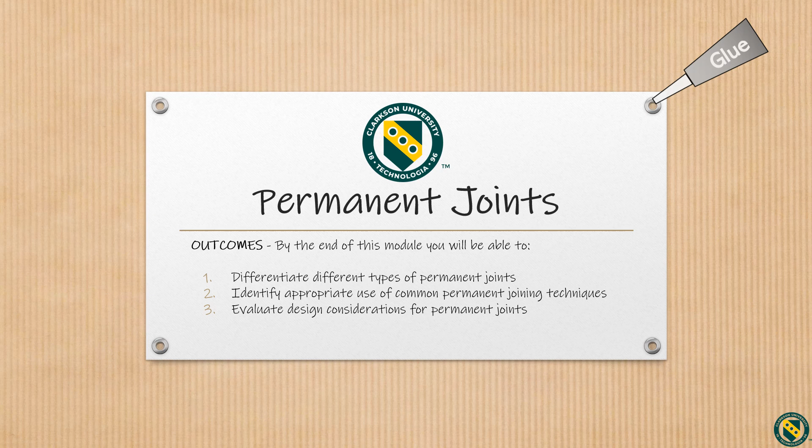A mechanical joint is a section of a machine which is used to connect one or more mechanical parts. We classify joints as non-permanent or permanent. Many industrial machine joint types are non-permanent.

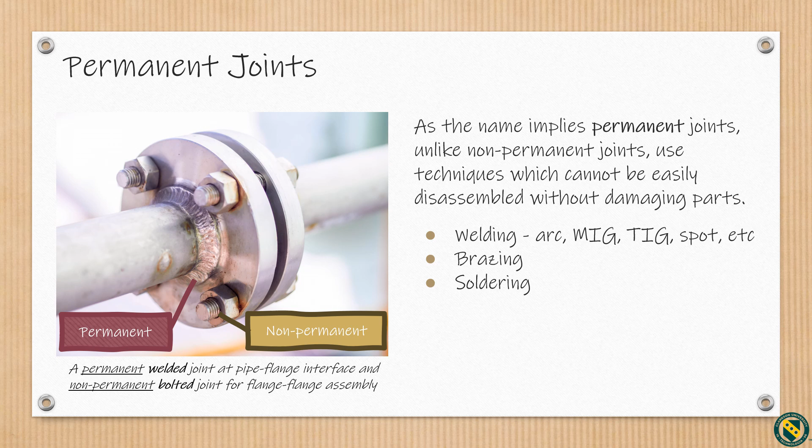Permanent joints, however, as the name implies, are designed to hold together forever. They're not easily separated without damaging parts. Examples include welding, brazing, soldering, adhesive bonding, and riveting.

Welding is a method of fabricating a permanent joint. It is typically used to create joints in steel, aluminum, or some thermoplastics. In general, the process consists of using electrical current fed through an electrode to bring the base materials to their melting point and to stir the joint together while the electrode is consumed.

As the joint cools, the two pieces of material are permanently joined and can only be disassembled by cutting them apart. The materials that are being joined should always be the same or very similar.

For example, welding a piece of 6061 aluminum to a piece of 5052 aluminum is generally okay as the material compositions are similar. Welding aluminum to steel is not recommended as the two metals melt at very different temperatures and the resulting joint would be very brittle and not structurally sound. There's many resources available for determining the weldability of materials.

Welding generally requires some amount of training and a lot of practice to become proficient. In certain industries, certifications are required in order to demonstrate the proper level of skill, for example, in pressure vessels, lifting bales, and aerospace applications.

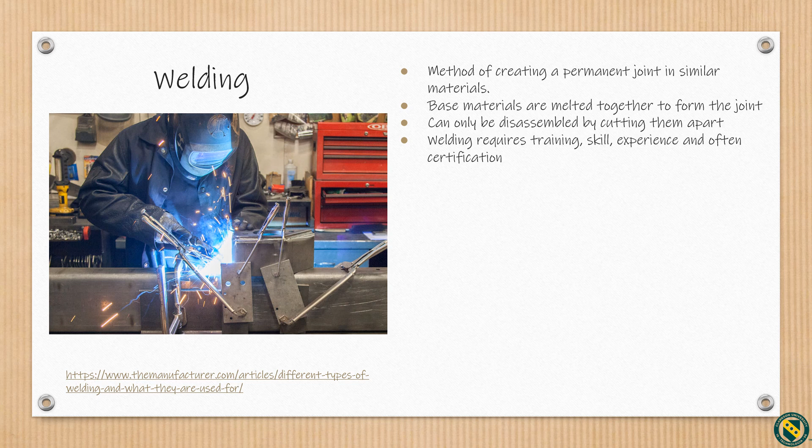Welding shouldn't be confused with brazing or soldering, which don't melt the base metal when creating the joint. The three most commonly used processes in welding manufacturing are SMAW, shielded metal arc welding, commonly referred to as stick welding; GMAW, or gas metal arc welding, commonly referred to as MIG welding; and GTAW, gas tungsten arc welding, commonly referred to as TIG welding. Examples of other less commonly used processes include spot welding, plasma arc welding, electron beam welding, and friction stir welding.

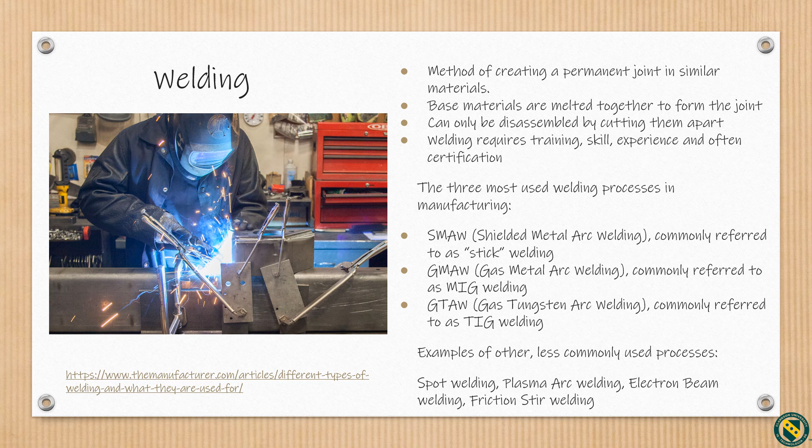Shielded metal arc welding, SMAW, is the simplest, least expensive, and most widely used arc welding process. It is often referred to as stick welding or manual metal arc welding. The filler metal is obtained from the electrode. Shielding is provided by decomposition of the electrode covering flux, which creates its own atmosphere, helping to control the welding process.

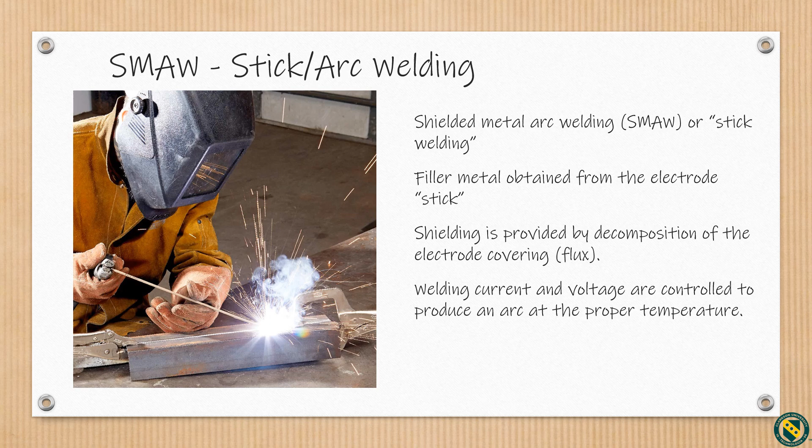All ferrous metals can be welded in all positions using SMAW. A welding voltage of about 15 to 45 volts and a welding current in the range of 10 to 500 amps is generally used to produce an arc with a temperature of about 5000 C. Average bead size is 3 times the rod diameter and not to exceed 5 times the rod diameter.

Slag covering the weld bead after the weld should be left in place until the weld cools. It helps to control the rate of cooling and can cause the weld to become brittle if removed too soon.

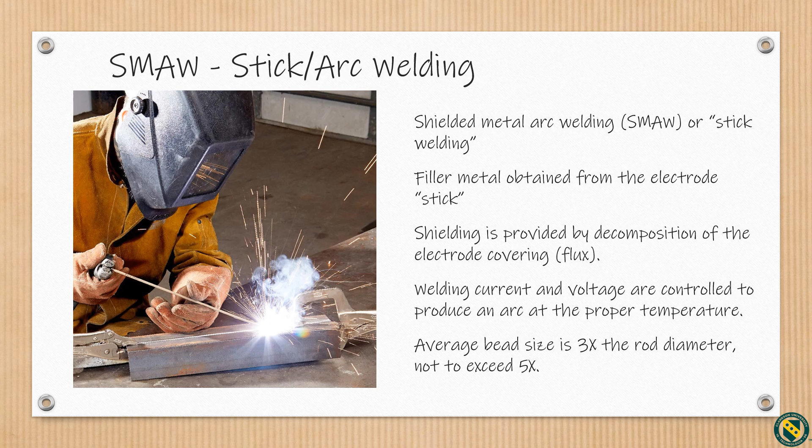Gas metal arc welding, GMAW, is a high-speed, economical process that is sometimes referred to as metal inert gas welding or MIG welding. The electrode is bare, containing no coating or core. The shielding is to protect the molten metal from reacting with constituents of the atmosphere.

It's supplied by an external gas, usually containing one or a mixture of the following gases: helium, argon, or carbon dioxide. Voltage is constant and amperage varies based on weld parameters such as material type, thickness, shielding type, wire alloy, and thickness. MIG welding is one of the easiest types of welding for beginners to learn.

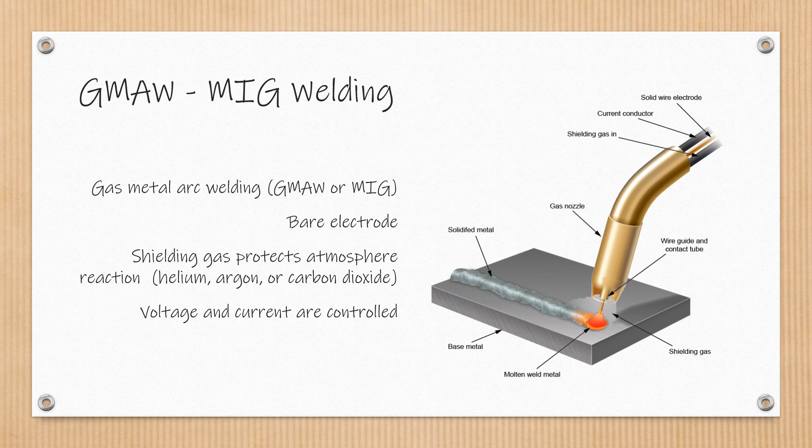Gas tungsten arc welding is referred to as TIG welding. It utilizes a non-consumable tungsten electrode and separate filler metal in the form of a wire. Inert shielding gas is supplied through an annular nozzle around the tungsten electrode, which serves only to maintain the arc. Shielding is obtained from a gas or gas mixture, usually helium, argon, or a combination of the two.

TIG allows the operator greater control over the weld than other welding methods such as shielded metal arc welding and gas metal arc welding. TIG results in stronger, higher quality welds. However, TIG welding is difficult to master and somewhat slower than other welding techniques.

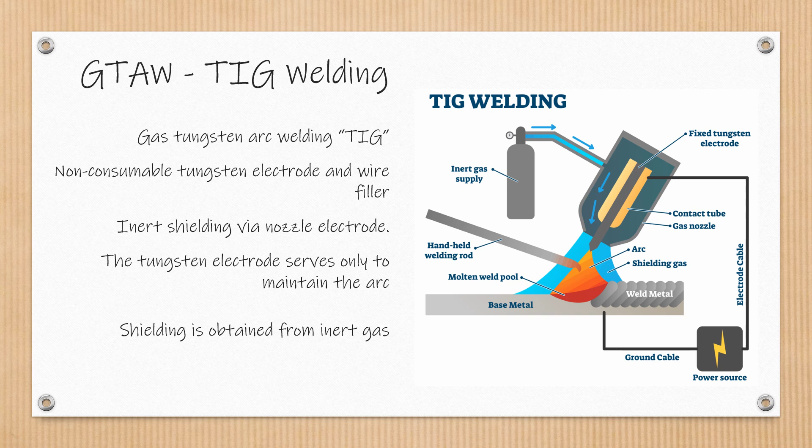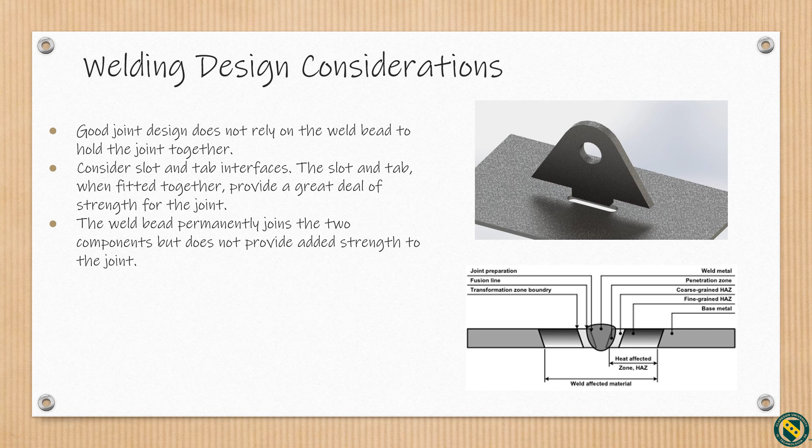The heat affected zone: consider the area around the joint affected by the heat of the weld, including thermal expansion, warping, residual stress, and cracks in some materials.

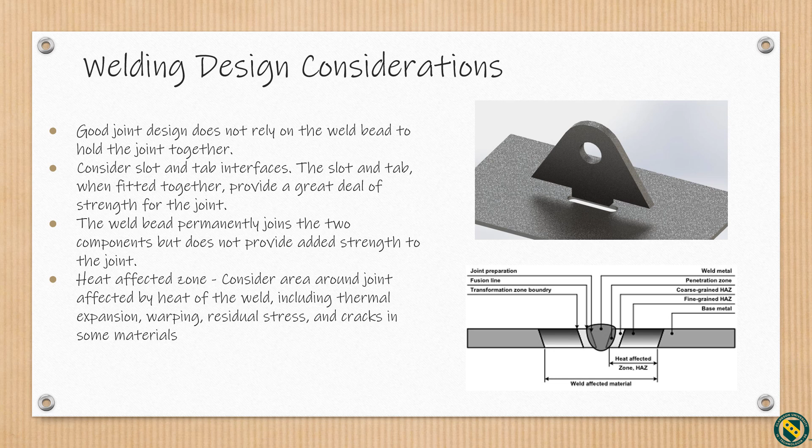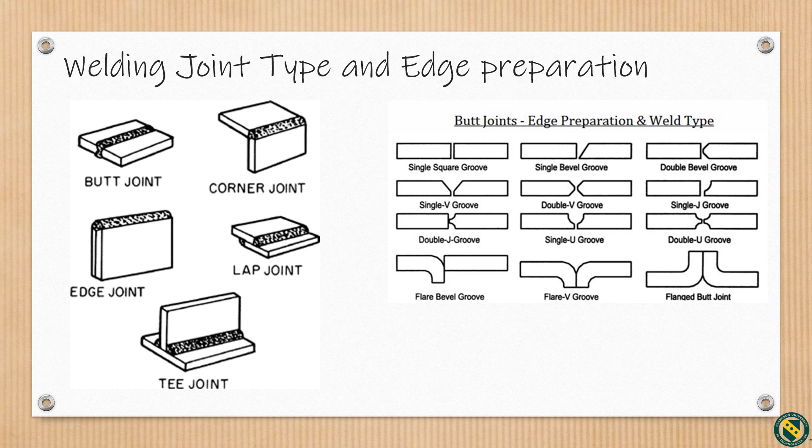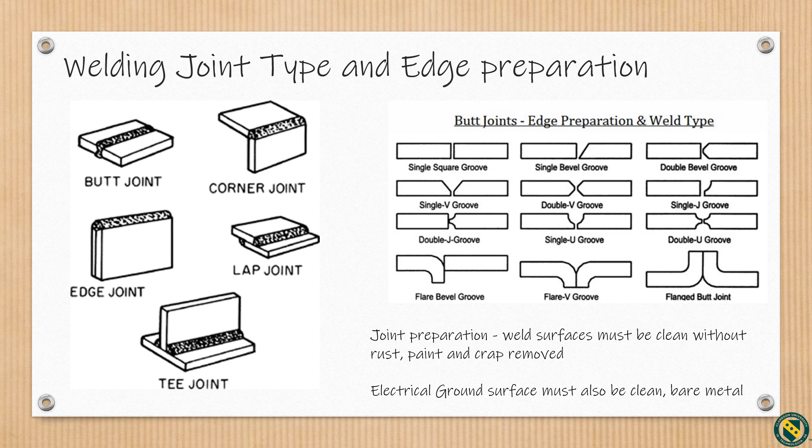Weldment edge preparation includes a variety of groove types, including square, single bevel, double bevel, single and double V-groove, J-grooves, U-grooves, and flares. Joint surfaces must be prepared and clean without any rust or foreign debris. Also, the electrical ground must be clean and bare metal.

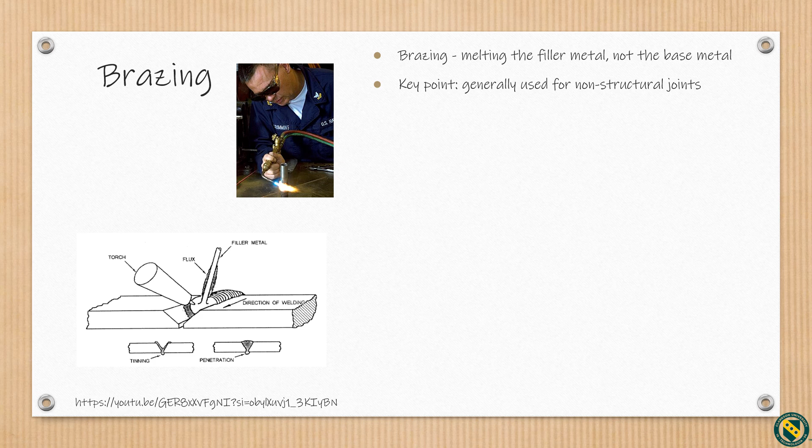Brazing is a permanent metal joining process in which two or more metal items are joined together by melting and flowing a filler metal into the joint, with the filler metal having a lower melting point than the adjoining metal. Brazing is not generally used for structural joints. Brazing differs from welding in that it does not involve melting the workpiece. Brazing differs from soldering through the use of a higher temperature and much more closely fitted parts than with soldering.

During the brazing process, the filler metal flows into the gap between the close-fitting parts by capillary action. The filler metal is brought slightly above its melting temperature while protected by a suitable atmosphere, usually a flux. It then flows over the base metal in a process known as wetting and is then cooled to join the workpieces together. A major advantage of brazing is the ability to join the same or different metals with considerable strength.

Techniques include torch brazing, which is most common, furnace brazing, and induction brazing. Brazing often uses dissimilar materials that are joined together, for example in heat exchangers, where a copper tube might be brazed to a stainless steel fitting. Often it's used with non-ferrous materials.

In induction brazing, usually ferrous materials are heated with the electromagnetic field created by alternating current and an induction coil, which has the advantage of being very repeatable.

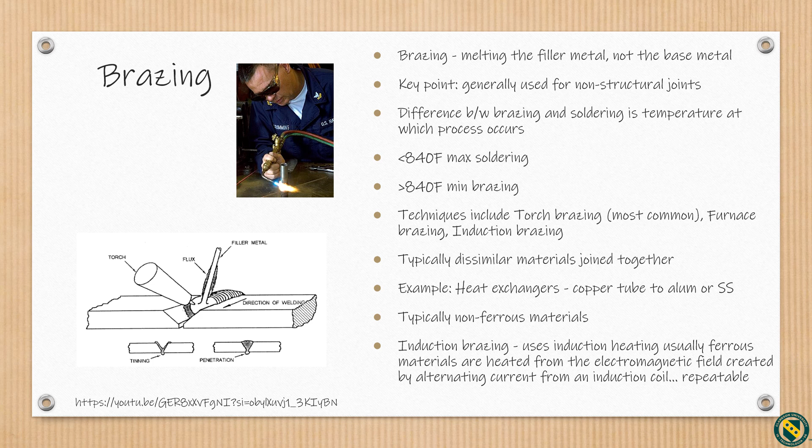Soldering is a process of joining two metal surfaces together using a filler metal called solder. The soldering process involves heating the surfaces to be joined and melting the solder, which is then allowed to cool and solidify, creating a strong and durable joint.

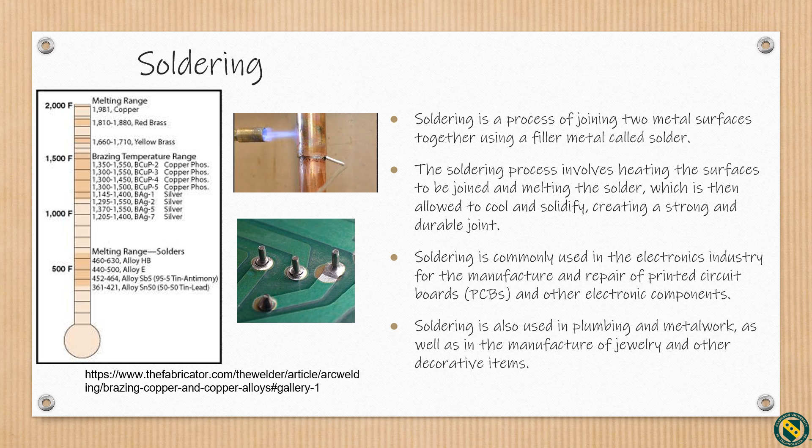Soldering is commonly used in the electronics industry for the manufacture and repair of printed circuit boards and other electronic components. Soldering is also used in plumbing and metalwork, as in the manufacture of jewelry and other decorative items.

Adhesive bonding is one of the simplest joining techniques where materials are permanently joined together by an adhesive substance, such as glue or silicone or epoxy.

An example of a modern adhesive application is automotive frame joining, pictured here, where adhesives replace traditional welding techniques. This application highlights the advantage of adhesives for complex joint geometries requiring high bond strength.

Adhesive joint application factors include environmental and thermal conditions, loading modes such as shear, tension, compression, bending, or torsion, materials, joint shape, fit tolerance, and life cycle dynamics.

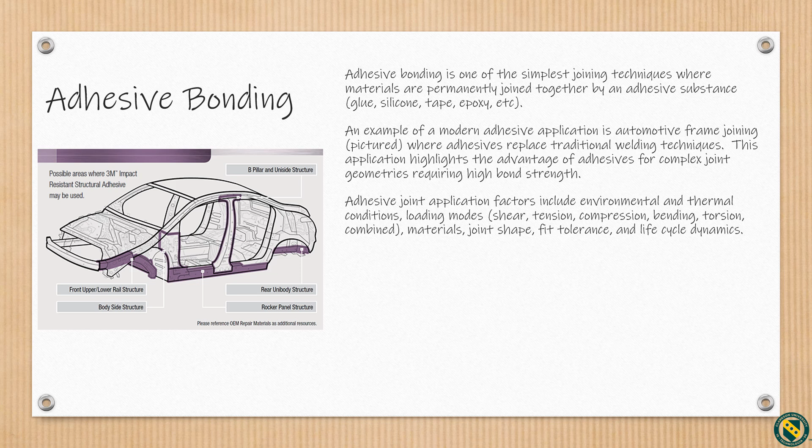Factors for the adhesive joining process include surface conditions, oil tolerance, substrate material, contamination, temperature, humidity, clamping force, and cure time. Appropriate adhesives must be selected for each application. Due to the wide variety of design considerations, there's no one-size-fits-all adhesive for all purposes.

3M, Saint-Gobain, and Henkel are leaders in the adhesives industry. 3M's design guide is a useful learning resource.

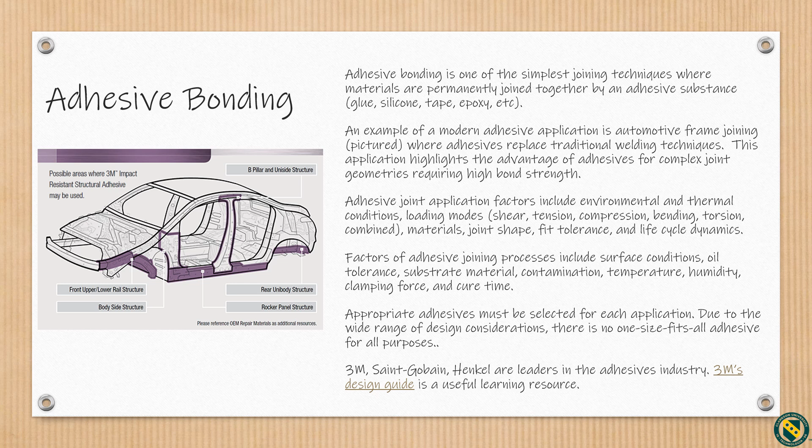Rivets are a type of permanent joint commonly used in airplanes, boats, trailers, and engineered structures. A solid rivet is a cylindrical shaft with a crowned, round head and a tail end that is hammered or crimped with a compression tool. The protruding tail end is deformed, holding the joint assembly together.

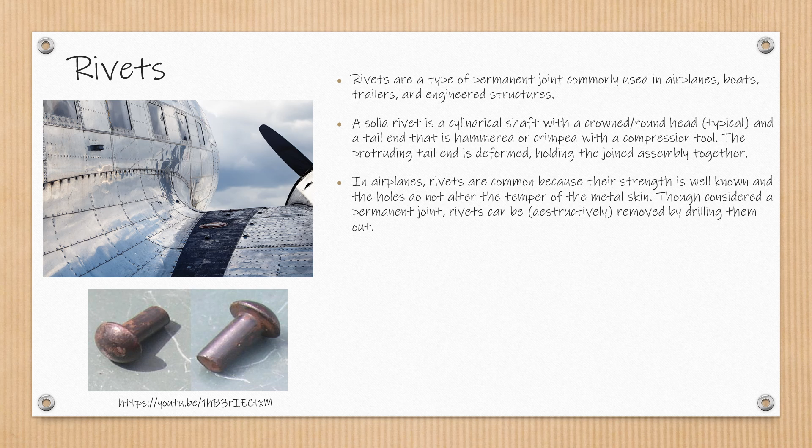In airplanes, rivets are common because their strength is well known and the holes do not alter the temper of the metal skin. Though considered a permanent joint, rivets can be destructively removed by drilling them out. A disadvantage to riveting joints is that most solid rivets require access to both sides of the joint.

However, blind rivets, aka pop rivets, are a type of rivet that requires access to only one side of a joint. A solid riveting tool includes pneumatic and hydraulic hammers and bucking bars. Blind rivets use a pop rivet tool and pulls a pin through the rivet. Rivet materials, geometry, and installation are governed by ISO and ASME standards.

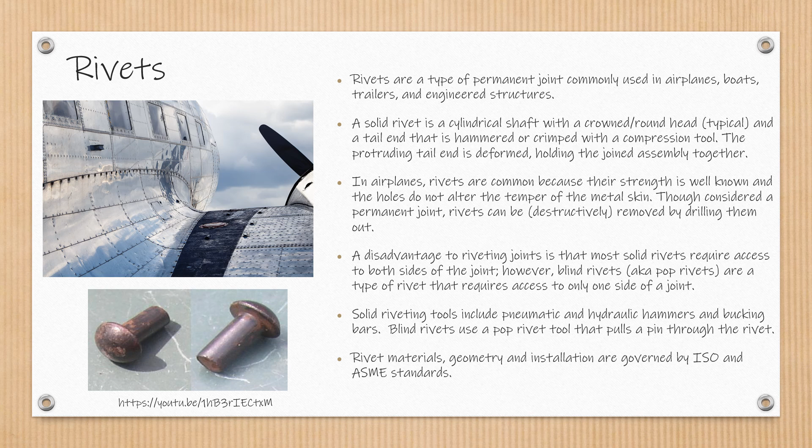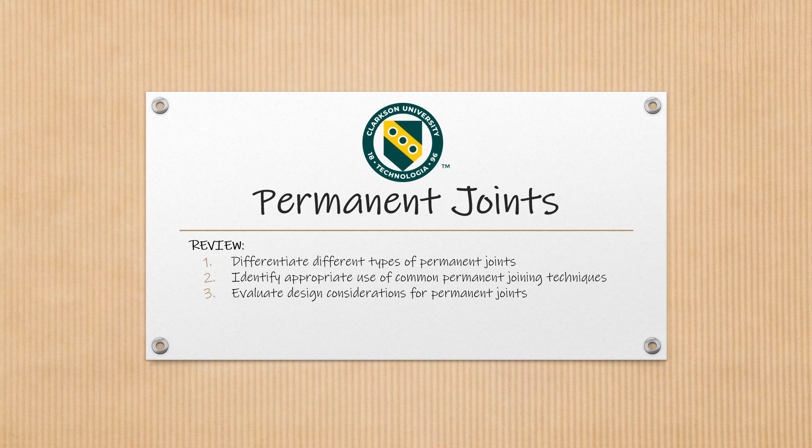This concludes our discussion of permanent joints in manufacturing assembly methods. After completing this module, we can differentiate different types of permanent joints, identify appropriate use of common permanent joining techniques, and evaluate design considerations for permanent joints.